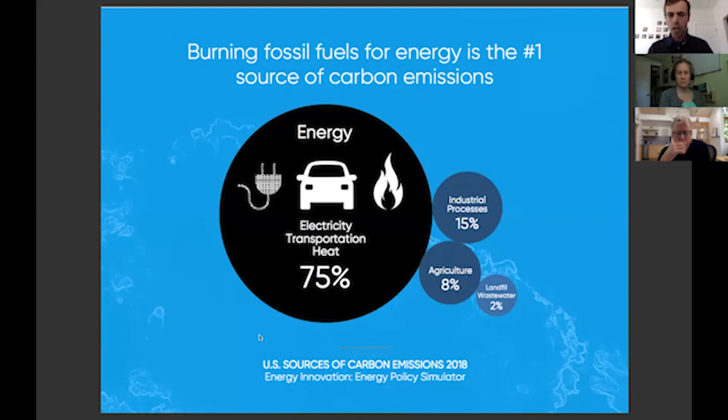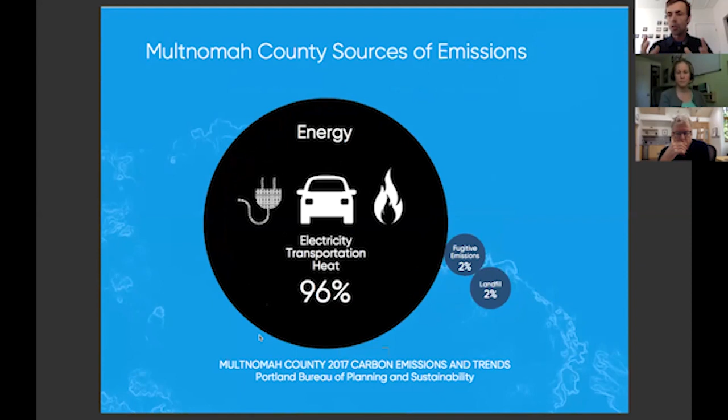For a very high top-level view on where our carbon emissions come from and why we're inspired to electrify, you can see here that burning fossil fuels is the #1 source of carbon emissions in our country, and most industrialized countries look like this. Around 3/4 of the emissions come from burning fossil fuels for electricity, transportation, and heat. In Multnomah County, it's 96%. We don't have much agriculture here. So the vast majority of our emissions come from burning fossil fuels.

And our household emissions are around 60% from burning fuels for these three uses. And rather than this being an overwhelming statistic, we feel empowered by this because we have a lot of control over how we drive our cars, the kind of fuel we use to heat our homes and heat our water, and the kind of electricity that we buy. And so we have a lot of control over that. Whereas with stuff we buy and with food that we eat, we're trying to do our best, but we're at the mercy of big systems. So that's an empowering message to us.

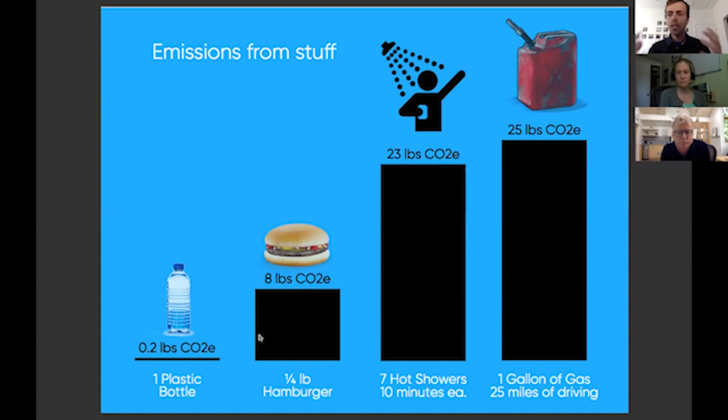One other thing we like to show for what a low-hanging fruit electrification is, there's a suite of choices we have for electrification. We've got recycling, eating less meat, getting efficient shower heads, and all these are important. But electrification is some of the lowest hanging fruit. You can see by this stat, 1 gallon of gas saves 25 pounds of CO2. So when you switch to an electric car and keep it your entire life, how many gallons of gas is that? We just want to highlight the importance of CO2 and the fact that burning fossil fuels is the primary cause of our climate crisis.

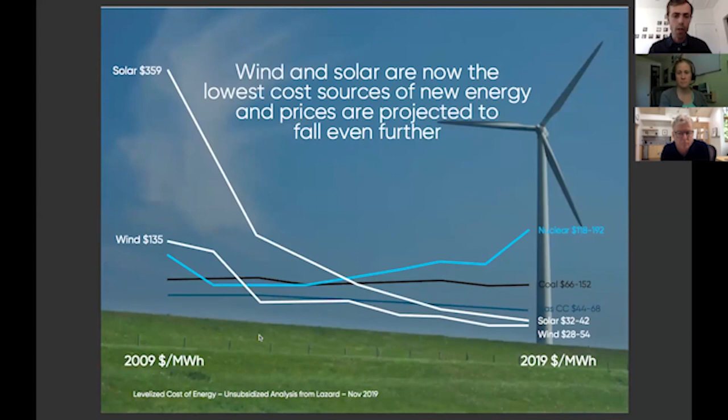The great news is we have these incredible technologies of wind and solar that are cost effective, and we can switch to them quickly. We combine that with energy efficient electrical appliances like heat pump water heaters and induction stoves, and we can run virtually all our lives on electricity. This gives you an idea of how, over the last 10 years, solar and wind have dramatically declined in cost to become the lowest cost producers of electricity.

So out of these trends, this philosophy is formed: electrify everything. We can power all of our lives on wind and sun. It can supply all of our energy needs. And that's what our panelists are going to be talking about today.

Let me introduce them. Karina Hirschberg, she's a lead engineer at PAE. Karina has over 12 years of experience in innovative electrical systems design, including research on renewable energy development, green building methods, and eco-districts. You can read about some of her projects here. Karina is going to give a high-level view of how the grid is getting cleaner, and some of the hidden emissions of natural gas.

Our next speaker will be Brian Stewart. He's the founder of Electrify Now. He has over 35 years of experience in product design and manufacturing. Before retiring from Nike, he was vice president of sustainable innovation, where he led programs to reduce waste and cut carbon emissions. He founded Electrify Now to help educate homeowners on how to dramatically reduce their carbon emissions through electrification. Brian will talk about individual use cases, how we can make these changes, what that looks like, and how it's good for individual homeowners and renters.

So with that, I will stop sharing my screen and turn it over to Karina.

All right, let me get my screen shared here. All right, look good? Yep. Looks good. All right, okay. I got myself all oriented here. All right, okay.

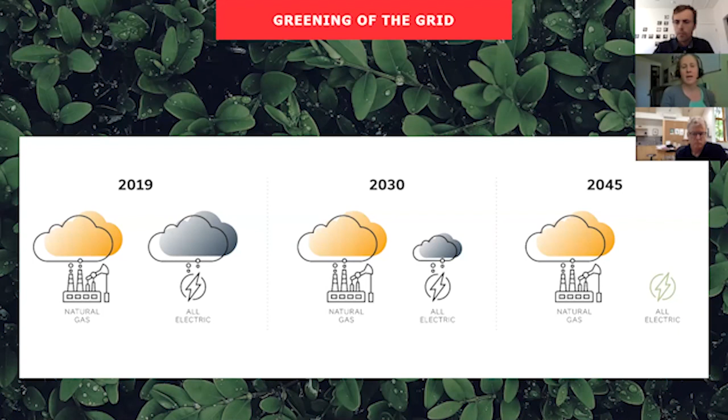And so that's a nice idea, right? But it's always good to kind of check that. It's a great theory. But what I will be diving into today is the data behind that, confirming that this is actually what's happening, and that it's not just a nice idea, but in fact an actual reality. So a bit of what I'm sharing today is my own research journey that I've done over the last couple of years, and some key questions that need to be answered.

So that we can all feel comfortable that we're doing the right thing, heading the right direction. The way I framed it for my own research was, the first one is: is there still a place for natural gas? Natural gas has been called the clean burning fuel, or the bridging fuel, the bridge between coal and renewables. So is there still a place for it? What does that transition look like for it to be achieving what we're hoping it's going to achieve?

And then, of course, are the grids getting cleaner? This whole premise that they're getting cleaner, let's confirm that that is actually happening, and understand what that looks like. And then last is, how will the new loads be supported? This is one I get asked a lot: if all the buildings and all the cars go electric, will the grids have to put on new fossil fuels to meet it? Because we don't want to move natural gas from one side of the table to the other. We really want to move it out of the system. So answering that question of how the grids meet new loads coming on is the last key one we want to touch on.

So I'm going to start first with a look at natural gas. First, the fundamentals: natural gas, that's not really what it is. It's methane, CH4 is what natural gas is. So it's methane, which is a greenhouse gas.

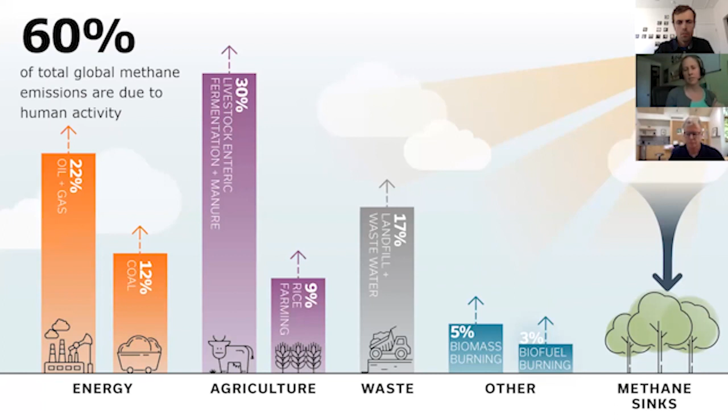So what does that all mean for the built environment? Buildings we consider as having three main sources of greenhouse gas emissions. The one we're talking about today, when we get really deep and geek out hard on building emissions, is operational emissions, which is related to the operation of the building. That's what we're dealing with today in the discussion about electricity and natural gas, trying to tackle that specific element of emissions within the built environment.

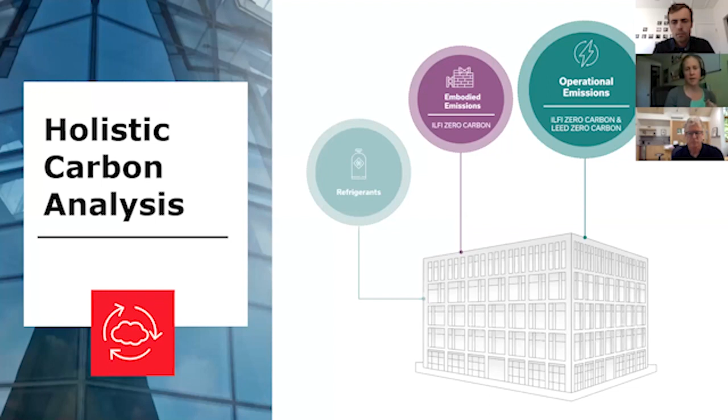The way we calculate this is we take our total units of energy and multiply them by an emissions factor, and that tells us what our total emissions are. So if you're trying to figure out the carbon footprint of your lifestyle or your home, that's essentially what some of those calculators out there are doing, and that's what you can do yourself as well: take your units of energy, multiply by the emissions factor, and then you get your total budget.

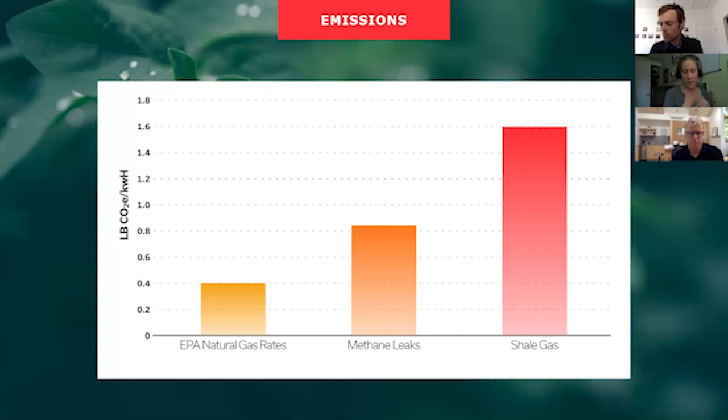The problem with natural gas is that the emissions factors that are out there and published right now are low, and there's a mounting body of evidence starting to come out as we're able to do more measurement and field analysis, showing they're extremely low. We've probably been undercounting them for quite a while, and that matters because our totals have been off, and as we do our own analysis on our own homes, our totals have probably been low.

The reason for this is that there's a leak issue within the supply chain. If we look at the natural gas supply chain, it's huge, complex, long, with lots of moving parts. And the more moving parts you have, the more likely things are going to break - that very much applies to these long supply chains. What we're starting to find is that there are more leaks happening than we're aware of, and that aren't being accounted for in these overall totals.

In fact, it's potentially what they call the super emitters - a few very large leaks that are really tipping the scales, maybe as much as 50% of total emissions coming from 5% of leaks. So if that 5% of leaks isn't being reported, those emissions are sort of phantom emissions that are part of the supply chain but aren't showing up in the emissions rates we're using.

This is an example, and if folks are interested in learning more about this, I do recommend it - there's been a couple of good pieces from the New York Times in the last couple of years. They have a very well done interactive piece that came out late last year that I recommend folks look at.

But this one was an interesting case - it was a leak that happened in Ohio, I think about two years ago. It was known to be a bad leak. They ended up having to evacuate some of the homes in the area, but it wasn't considered to be a really catastrophic leak.

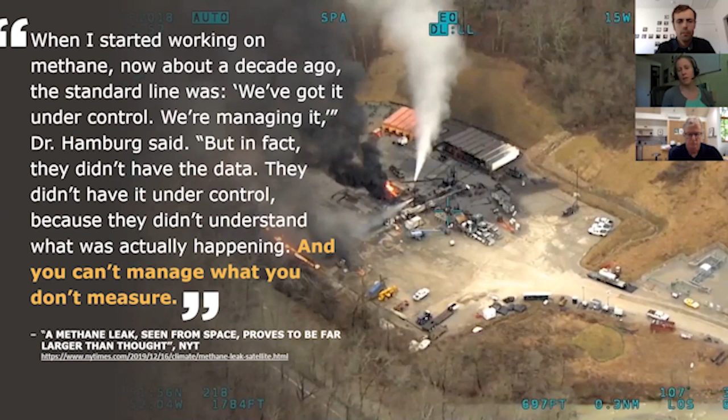And this matters, right? Because again, we think of natural gas as being the clean burning fuel, the bridge from coal to renewables. That has been changing, as we account for more of the leaks and factor in things like fracking and its impacts. The comparison of it being better than coal starts to get a little murkier.

What some of the analyses are starting to show is that at a leak rate of about 3% across the whole supply chain, we may start to cross over from natural gas being less damaging than coal to being as damaging as coal from a global warming standpoint. So the real question is, what's the real leak rate? The problem is, nobody really knows - I've seen estimates as low as 2.8%, and I've seen them go as high as 6%.

So we're either right at the cusp or we've already crossed it, but we just don't know because these aren't being measured as well as we need them to be to really answer that question.

So if we go back to our stack up of how methane stacks up against CO2, with our 20-year global warming potential adjusted for the time factor, and then try to take a guess at the leak rate—I've seen anything from the EPA's rates to 2x or 3x increases, but I took a more conservative 1.5x—if we account for leaks, we see it's really starting to stack up. So CO2 and methane are both really big deals. Maybe we should be dealing with both of them.

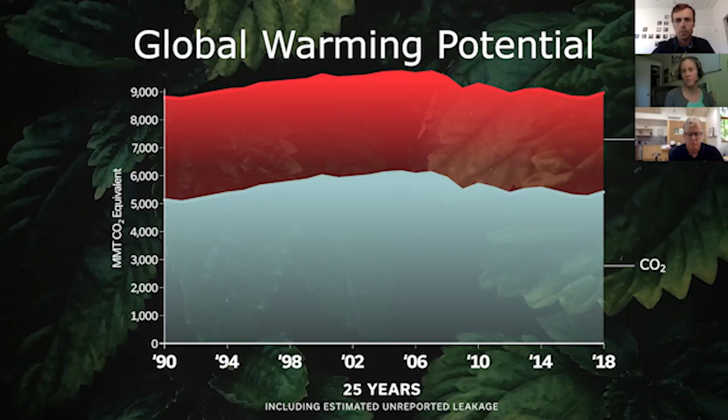This is important because as we start to tackle this stuff, understanding its contribution is important for us, so we make sure we're putting our efforts in the right place as we try to make positive progress.

And of course, the leak issue is not new information to those in the industry. It's something RMI and Environmental Defense Fund have been working on for years, trying to get policies in place, and they were quite successful for a while—there were some really good regulations put in place. Then there was an administration change, and they've pretty much all been rolled back, removed, or canceled.

There was a great article recently about one of the recent policy changes, and there was a quote in there that if you read it out of context, you'd think it came from RMI or something like that. It was actually from the president of Shell, talking about how upset they were at the policy rollbacks. You'd be surprised to hear it from Shell, but even the oil and gas majors were against a lot of these rollbacks, because it goes against their own climate commitments and undoes their PR efforts around natural gas as a clean burning fuel. So this is pretty interesting politically—both environmental groups and some oil and gas majors have been against these rollbacks.

And at the state level, we're seeing some pretty interesting activity too. The electrification movement from a policy standpoint has really taken off in California. I think there are over 30 cities and jurisdictions that now have some sort of policy around electrification, either for new construction or major renovations, trying to shift everybody to electric-only services.

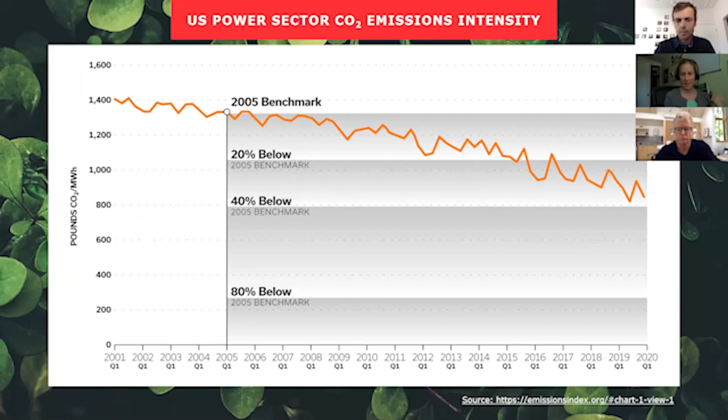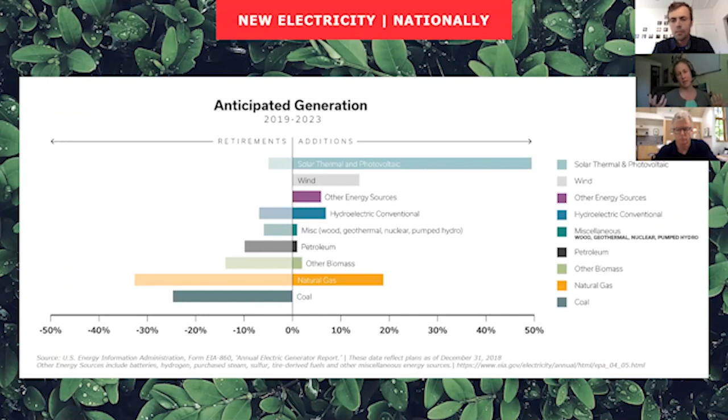So how are things going on the grids? This is the other flip of it. At the national level, we see emissions are coming down. That's good. And in terms of new installations, it's predominantly renewables at this point. They really are very cost effective. It's the right decision environmentally, and also the right decision economically for utilities. And so that's most of what we're seeing coming online.

I will mention that grid emissions and the cleanliness of grids do vary region to region, so just be aware of that. Even along the West Coast, we have quite a bit of variation. We have some very, very clean grids and some that are a little bit dirtier. So the stage they are at in the transition might change a little depending on where you're located. But generally it's coming from the state mandates. And so this is an interesting one for us to watch from a policy standpoint as citizens and as voters.

Oregon's a little bit less aggressive than Washington and California, but we're still trying to get there. So a 45% reduction by 2035, 80% by 2050. It'd be nice to see that get a little more aggressive in the future, but we'll see. So our two main utilities in Oregon, PGE and Pacific Power. How are they doing? We want to make sure that they are getting cleaner, and the good news is that they are. From an electrification standpoint, that's what we want to see. They are on track to meet the targets that are set by the state.

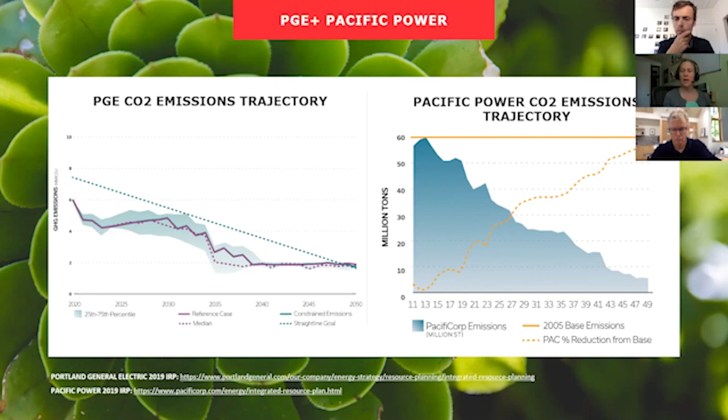PGE is going to get there a little bit faster. Actually, I think they're scheduled to hit the 80% mark by 2040. And Pacific Power is an interesting one because they're actually one of the dirtiest grids on the West Coast. They had a lot of coal, but even they're accelerating it. This is showing their plan in 2017 versus 2019, and they're actually moving faster than originally planned. So that's been really exciting to see, because again, they're one of the dirtier ones. So to see them cleaning up moves all in the right direction for the electrification movement.

One interesting little caveat in this is that when we look at the utilities and what their plans are for decarbonization, there's kind of the big ones that we all know about, right? It's wind and it's solar, and then storage is now the other one. But there's one more, and this one is called grid interactive buildings, or load flexibility, sometimes called demand response. And this is the one where us as individuals, as homeowners, can have a lot of influence.

And what this says is that it's not just where your energy is coming from in terms of whether you have solar panels on your house or whatnot, but it's when you're using energy and trying to avoid peak times, because that's actually the part that's hardest to solve in the grids, is the peak time. And that's where we're most likely to see potentially new fossil fuel resources come online, or when they get used, is during these peak times. So the really hot day, right, when everybody turns their air conditioning on.

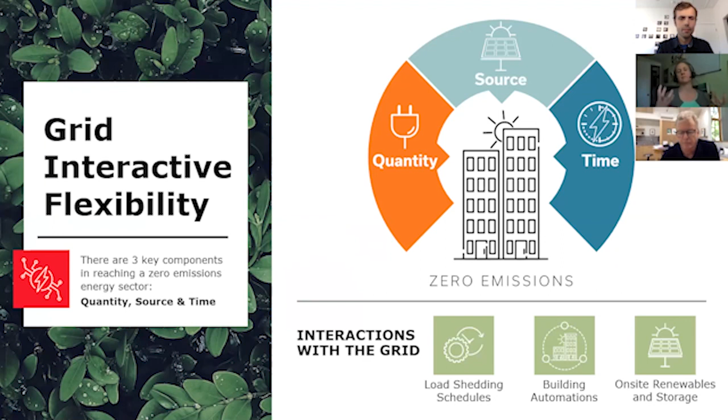That's the one that we have a really active role to play in, which is kind of interesting because it doesn't get talked about as much as some of the renewables and the storage, but it can be a really impactful one, and it's one that comes with the electrification movement. A lot of the devices that are part of it, the heat pumps and the EV chargers, actually have the software in them that allow you to do some of these adjustments to avoid these peak times and avoid those really dirty resources from coming on.

And I'll give an example here. PGE has a program that as residential customers you can participate in, and you just get a text message the day before that says, tomorrow is going to be a peak time, if you could reduce your usage between 5 and 8 p.m. And right now, it's all very low tech. You just kind of turn your lights off and eat sandwiches for dinner instead of cooking.

But the event that they had in June was one of the first ones that they had, and these really minor adjustments that everybody made that were pretty much unnoticeable, I mean, my family didn't even notice that I was doing anything, was enough to equal 11 megawatts of reduced load, which meant an equivalent of half of what they call a natural gas peaker, which is one of the dirtiest sources of electricity generation, which is amazing. It was all these little tiny incremental elements all added up to something that was actually really big. And so that's kind of an exciting one.

Again, with that electrification movement, we have this chance to participate not only in cleaning up our homes, but then also participating in the whole grid decarbonizing, right? We have a chance to play a role in that really big movement.

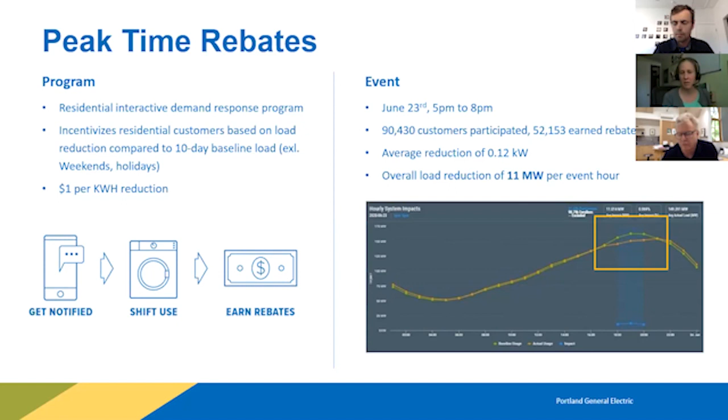And I think I'm running out of time here, but I did play around with the numbers. I couldn't help myself. I did my own home on this, and I actually do have natural gas in my house. I bought my house about 10 years ago. It was still on heating oil. We had a tank in the garage. And about 3 weeks after we moved in, there was a huge cold snap and the furnace died. And we had to make a very quick decision.

And I at the time was like, oh, natural gas is the clean burning fuel. And there was a whole bunch of incentives available. And so we installed natural gas on our house. And of course, now here I am 10 years later looking at how to exchange it all over and starting to put that plan together of how to get myself onto being all electric. And so I ran my own numbers.

And what was interesting is that today, if I were to make the switch over using the EPA's low emissions rate, I'm already lower emissions if I was all electric. If we use that adjusted rate for the 20 years, the shift changes even more. And then if we account for leaks, even more. And then if we move forward 5 years, I'm a PGE customer, and we look at PGE's plan for their own emissions decreases, the differences are even more striking.

And so the single biggest thing that my family can do is to move forward with our plans to switch out our various systems. We're probably going to do the hot water heater first, and then we're going to move on to the furnace next. And that's kind of what my family's plan is.

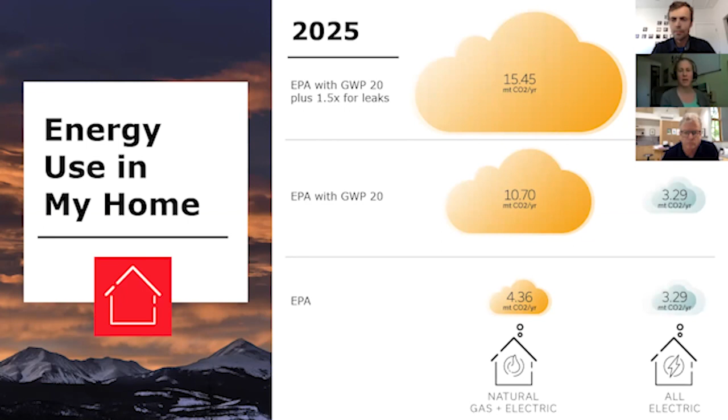There's other benefits we did not get a chance to touch on today. Resiliency is one of them. I do want to mention that because that is something that's available with electrification that is not with natural gas. And so there's kind of, again, that dual benefit of environmental benefits as well, but then we also see resiliency benefits with homes that are moving to electrification.

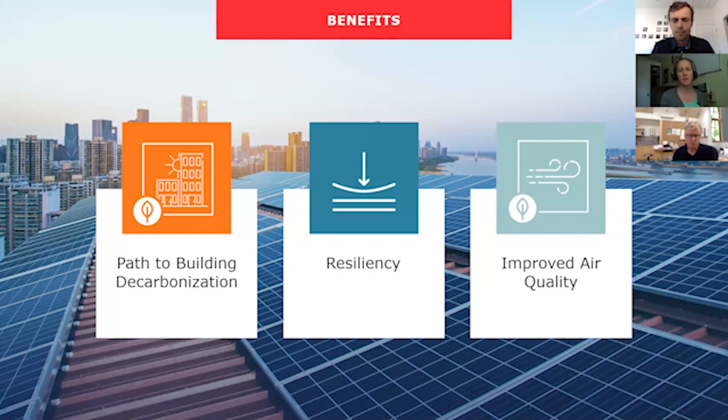So the punchline in all of this, right, is that natural gas is getting dirtier. The grids are getting cleaner. They're getting cleaner faster. We've already made that cutover where it's better to be all electric now than natural gas. That transition has already happened in our region as we compare our utilities to natural gas, and then it's just going to continue to accelerate.

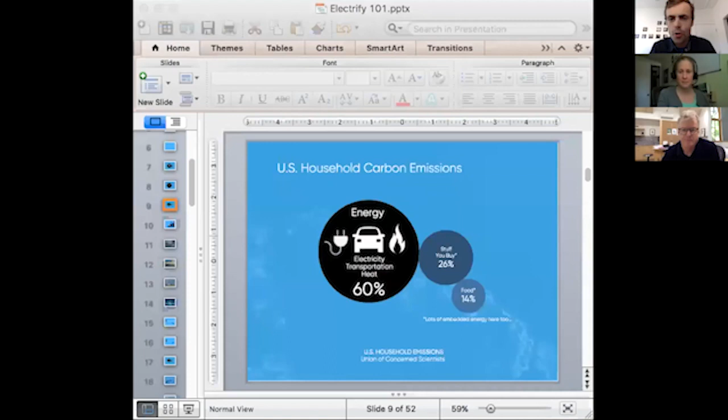Great. Are you able to see the screen there? Joe? Yes. Okay, great. Thanks. So yeah, thanks for the introduction.

And I wanted to start off by just reminding people of this slide that Joe showed earlier about 60% of our home emissions coming from burning fossil fuels for electricity, transportation, and heat. And what I'm going to be talking about today is what we can do as homeowners to be part of this transition to clean energy. Karina did a great job of showing us the grid's getting cleaner, which is awesome. We're going to be talking about ways to help accelerate the grid to get cleaner in the choices we make in our homes.

The awesome thing about this slide, like Joe mentioned earlier, why it's cause for optimism, is that black circle we have control. We can, as homeowners, make that 60% go to zero through the choices we make for the large appliances in our homes. And that's really what we're going to be talking about. Whereas these other two over here, the stuff we buy and the food we eat, yes, we can help to make these go smaller, but for the most part, these are out of our control. It relies on corporations and farms to increase their sustainable practices. So let's talk about what we can control.

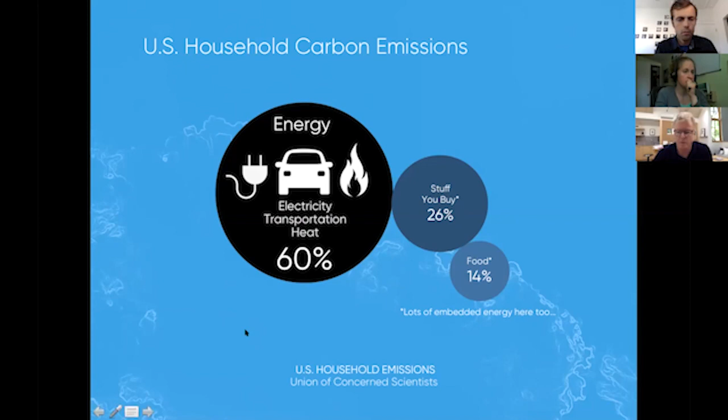And I want to start with, okay, sorry, I'm in the wrong place. I'm having to advance here quickly, sorry.

Okay, let's start with just thinking about what you have in your own home. I did this in my house, and it occurred to me one day I've got all these devices in my home that burn fossil fuels. Everything from the stove that we cook on, the furnace, the water heater. We have 2 cars, we're a typical American family. Our lawnmower, barbecue, all these things burn fossil fuels. And when you add up the cumulative emissions from these things, it's over 20 tons a year for a typical American household. And I've done the numbers for Oregon and for America. They're not vastly different. It's a little bit better here actually than many places because our electricity is a little cleaner, but over 20 tons per year for a typical home.

And when you think about how much we spend on that, this is another number that's kind of invisible to most of us because we get monthly bills, we get occasional bills with going to the gas station, but when you add it all up, we typically spend about $4,000 per year per household on our energy bills, and really all that money for the most part is going to fossil fuels. So $4,000 per year per household.

You multiply that by 126 million households in the United States, that's $500 billion that people like us spend on energy every year. And this is not corporations and businesses, this is just homeowners, apartment dwellers, renters, people like us. As a reference number, there was $55 billion last year spent on clean energy investment.

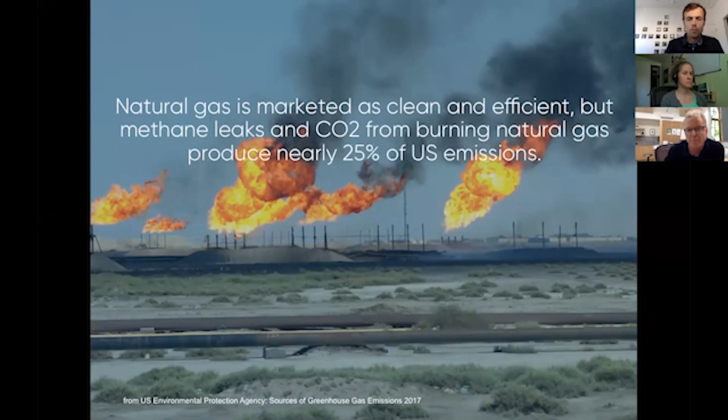But if you're a homeowner, what that translates to, because most of us here in Oregon use natural gas for heating, that differs in different parts of the country. In fact, we had a question from a friend of ours in Nevada who's on propane. Propane is actually a little bit worse, I'm sorry to say, than natural gas. But regardless, electricity everywhere is better than natural gas.

And if you look at your furnace, it's going to be about 3 tons that a typical furnace here in Oregon produces in terms of emissions every year. And a water heater, surprisingly, is almost as bad, at 2 tons. So those are the 2 big ones in your life. There's other things like your stove and fireplace insert, yes, but these 2 are the real biggies we're going to focus on.

And the exciting thing, I have to say, one of the reasons I'm so obsessed about this now is because a year and a half ago, when I was doing the research on this stuff, I didn't even know what a heat pump was. The truth is, these things have been around for decades and they're insanely efficient. They'll save you money. They'll give you all sorts of other benefits. They're way, way, way more efficient than natural gas.

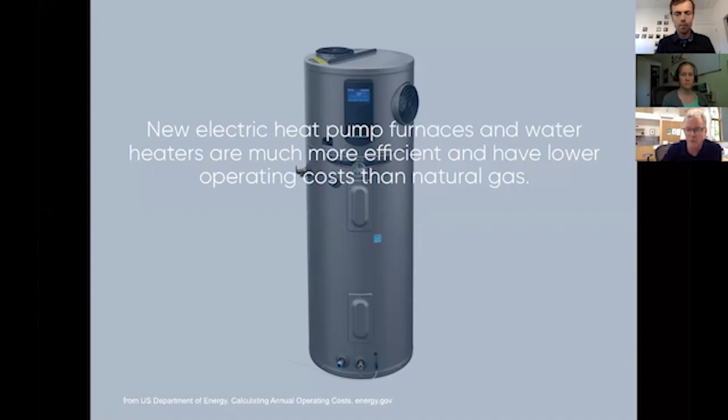And you can use the same technology, heat pumps, for furnaces, air conditioning, and for heating your water. It sounds like a space age thing, but the truth is they've been in our lives forever. Anyone who has a refrigerator has a heat pump in their home right now. Basically what this technology does is move energy from one place to another.

So your refrigerator, if you put your hand behind the back, you'll feel how it's warm back there. That's because it's moving heat from inside your refrigerator to your kitchen. Your kitchen gets slightly warmer, and inside the refrigerator, it gets cooler. So it's not making heat or making cool, which currently isn't possible, but it moves heat from one place to another, and that's why they're so efficient.

A great way of demonstrating this efficiency is to compare water heaters. Here in Oregon, if you spend $10 on natural gas, you're going to get about 5 hot showers for that. Maybe 7 if you have the most expensive, up-to-date gas water heater, which most people don't have because they cost like $3,000. But typically 5. For a good heat pump water heater, not even the very best, you're going to get 10 for $10 worth of electricity.

So twice the amount of benefit basically for the same money, which is why this technology is going to be the future. I think if we flash forward 20 years, the only kind of water heaters that are going to exist are heat pump water heaters. But the urgency to make this transition now is why you as a homeowner can make a big difference in terms of avoiding the worst effects of climate change. And it's going to save you money. This is why that's a fact.

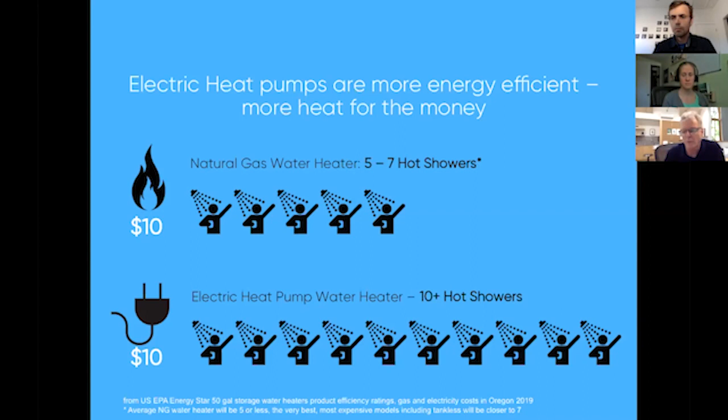Now, it's important to note that they can be more expensive upfront to install. We're going to go into all this when we dive into water heaters later, but you will more than make up for the money in the long term through the operating cost savings.

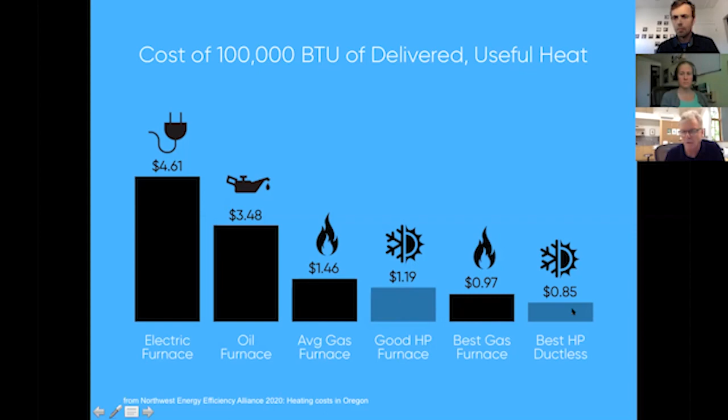The same is true with furnaces. It's not quite as dramatic, but for most people the relevant comparison is this: if you've got a furnace that's more than about 5 years old, it's typically in this rate, or it might be even more because efficiency degrades over time. If you've got an electric or oil furnace, a heat pump's going to blow those away in terms of cost per BTU. The very best modern gas furnaces are quite good in terms of their cost, but the big takeaway is that from a cost standpoint, heat pumps are at least neutral, if not better. And the best ductless heat pumps are absolutely the cheapest way to get heat in your home. We'll talk about all this in more detail when we get into the details on furnaces.

But the other advantage heat pumps have is they can work both directions, so they give you air conditioning as well. That's becoming more and more of an issue, even here in the cool Northwest, where summers are getting hotter and forest fires don't make you want to open your windows at night. Having air conditioning essentially for free when you buy a heat pump furnace is pretty attractive. They're also more comfortable because they're moving air more constantly, so the temperature in your home stays the same instead of spiking when the furnace turns on and off. And because of that continuous air movement, you get cleaner air, which is actually noticeable. People are quite happy with the way these heat pumps perform.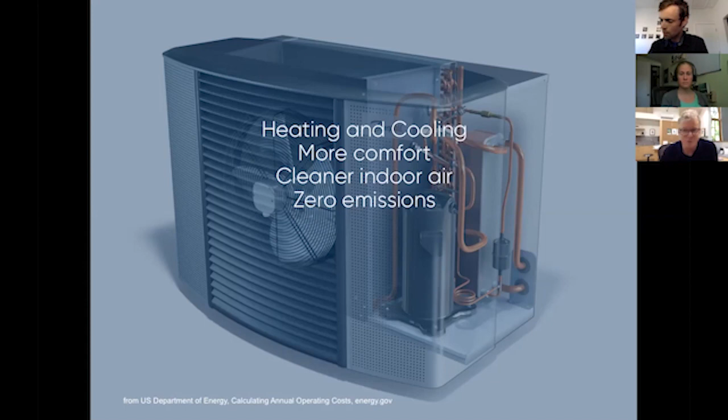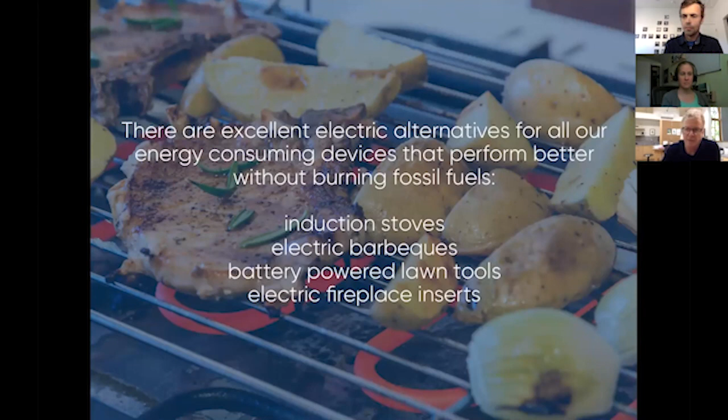And because you signed up for clean energy, it's creating zero emissions, which is fantastic. There are tons of other devices in our homes that burn fossil fuels, and there's an electric equivalent for every one of them. Believe me, I've done this myself, I can vouch for it, they're better. Induction stoves versus gas stoves, even electric barbecue versus gas barbecue — I'll talk to you about that, we're going to do a session on that later. But just know that any device you have right now that burns natural gas, gasoline, or propane, you can replace with an electric option, and you'll be happy you did.

Transportation — I think a lot of us know that transportation is a problem, and that cars create emissions. There's a lot of discussion too about airfare and air traffic, and a lot of shaming about air travel, and I get it. We should all be thinking about reducing air travel. I think the pandemic showed us we don't have to fly around as much as we thought. But the truth is, if you want to get from here to New York City or to Tokyo, there's no better way, no alternative other than to fly. So if you have to fly, I don't want to talk you out of it if you need to visit your grandmother or something. But the truth is airfare is a relatively small part of our transportation emissions.

The big one is the car in your driveway, by far the biggest one — 60% comes from cars we drive, another 23% comes from trucks on the road. The good news and bad news is we don't really have good solutions for those yet. It's being worked on — hydrogen's appealing and might come online, and there are some electrification options there, but this is going to be tough. There is good technology today to solve these two problems, and you're going to be seeing trucks on the road in the next year.

That's going to happen fast. And for the reasons we'll describe later, it's not because the truckers are really trying to save the planet. It's because it's cheaper. And the same is true for automobiles.

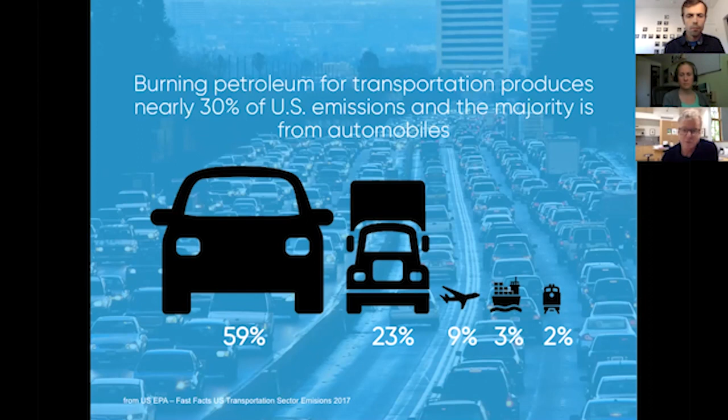The reason why these gas cars are so bad is because 1 year of driving around creates almost 6 tons of carbon emissions, which is about the same amount it took to make the thing. And then it's going to be on the road for 12 or 15 years. So that's 75 tons over the lifespan of it, which is 10x what the emissions were to make the thing in the first place.

That's a reason why you shouldn't worry about squeezing every last ounce out of any of these things you have, because that calculation is true for pretty much everything that burns fossil fuels. Don't worry about squeezing every last minute of life out of your fossil fuel things. Get rid of them as soon as you can, because using them is way worse than making them. So retire them. But 5.8 tons a year.

If you have an electric car, you charge it at home, which is what people do. 95% of the charging happens in your garage, plugged into your electric supply. And because you've done step number one, all your mileage is zero emissions, which is pretty amazing.

The great news is that battery prices are getting lower. It's on the same curve that we saw with solar, a tenth of what it was 10 years ago, and it's projected to get under $100 per kilowatt hour for batteries in the next year or so. So that means the cars are getting cheaper, and they're going to continue to get cheaper as they scale up.

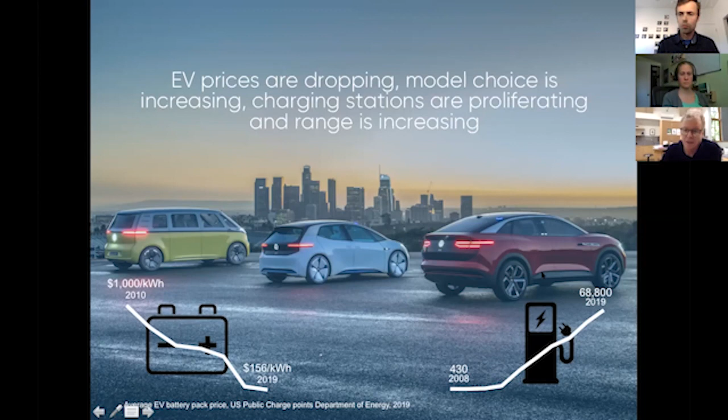And the prices are surprisingly affordable today. There's this perception that EVs are more expensive, and yes, there's some truth to that. But if you really dive into the numbers, you'll see that it's not true. They're actually cheaper, even today.

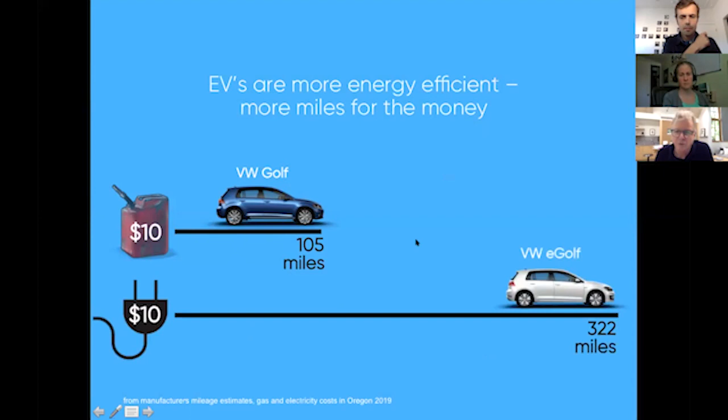The reason that the trucking companies are so excited about this is this comparison here. Another model where there's 2 versions is the Volkswagen Golf. The gas Golf gets pretty good mileage—for $10 of gas, you're going to get 100 miles of travel. The electric version, for $10 of electricity, you're going to get 300 miles of transportation. So this is why the trucking industry is so interested in this, and why it's going to happen fast in that sector, because fuel is the most expensive part of their operational cost by far.

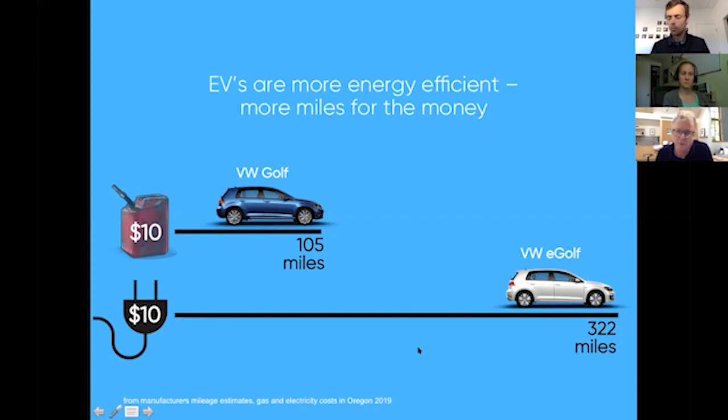And then the other thing, the qualitative things—talk to anybody who owns an EV, they'll tell you they're never going to go back to a gas car. They're way more fun to drive, faster acceleration, all that stuff. Even my wife, who isn't a big car enthusiast, is crazy about how fast our cars accelerate and how fun they are to drive. And yeah, who wants to go to a gas station? Raise your hand if you love gas stations.

I don't think many people out there are raising their hands. You can just eliminate that from your life. So there are a lot of other good reasons to do this.

I've thrown a lot of information at you and we're running short of time, but if you take nothing else away from this, remember these 4 largest sources of emissions in your life. Yes, it's important to think about the choices we make for the products we buy, the food we eat, how much we travel, and energy efficiency is super important. But these 4 decisions you make — the electricity you purchase, the car you drive, the furnace, and the source of energy for your furnace and water heater — those blow any other decision about carbon emissions away by factors of 10.

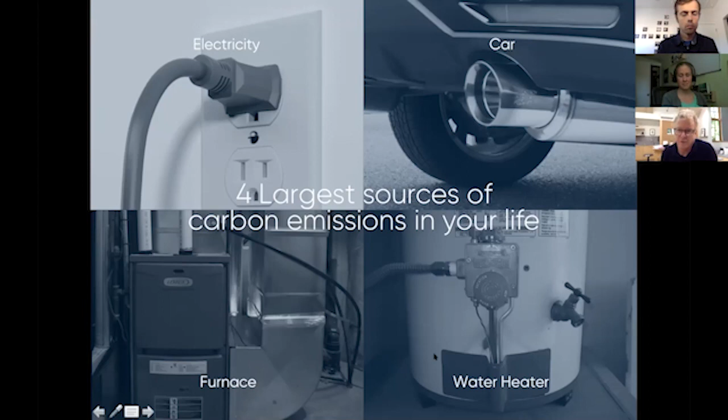These big ones aren't fun to do. Nobody wants to buy a new water heater. But when it's time to do that, make sure you're thinking about heat pumps, same with furnaces, and do it sooner than you might otherwise want to if you're able to, because that's how you're going to avoid a lot of carbon.

So, summary: these are the 3 steps. Clean up your electric supply — I'd ask you to go check where you are on your electric plan as soon as you hang up here. Electrify your home, electrify your ride. You're going to be avoiding tons of carbon emissions.

You're going to enjoy a more comfortable life and a lot of performance benefits. You will save money on operating costs, absolutely. And importantly — this is a really big one — what you're doing is helping accelerate the transition to these clean energy solutions, which are essential. Otherwise it's really bleak for our offspring in terms of what the world's going to look like to live in. So the faster we do these things, the better.

If you want to hear about what this can look like on a more national scale, I love this book from my friend Saul Griffith. He just launched this a few days ago. It's kind of a handbook for how to do this on a large scale — kind of equivalent to thinking about the way we mobilized for World War II. It's that kind of thinking. It's a really good read if you'd like to see what that looks like on a national scale. And again, if you have any questions about this, we have tons of information on our website, electrifynow.net.

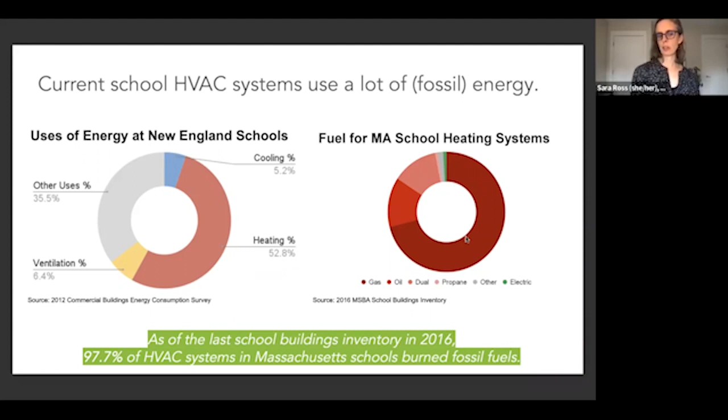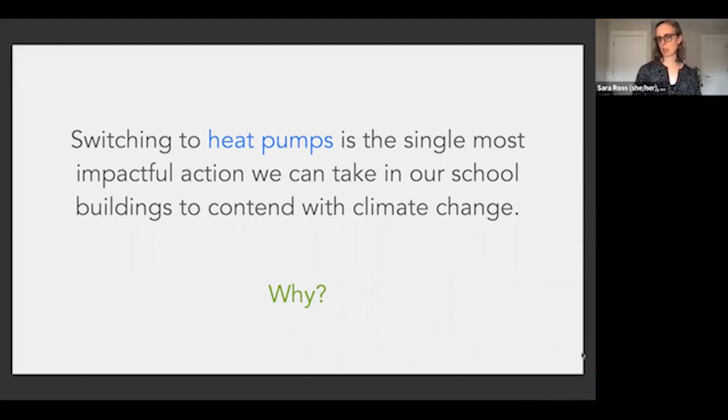You can go to the next slide. Next, I'm going to make the contention that switching to heat pumps is the single most impactful action we can take in our school buildings to contend with climate change. Why is that the case? Let's step back and make sure everyone knows what a heat pump is. Heat pumps are a magical piece of mechanical systems that do a smart thing and move heat rather than burning fossil fuels to make heat.

This eliminates all the on-site combustion that would normally be associated with an HVAC system. This improves indoor and outdoor air quality. Heat pumps are also highly efficient, whereas a brand new top-of-the-line gas boiler is only going to get to 98% efficient. Heat pumps, particularly ground source heat pumps, can get to 300 to 600% efficient. That means for every 1 unit of energy we put in to run this piece of mechanical systems, we get 3 to 6 units of heat out. And again, that magic happens because we're moving heat rather than burning things to make heat.

The last thing to know about heat pumps is that they offer both heating and cooling. This is really important for our school buildings. Can move on to the next slide.

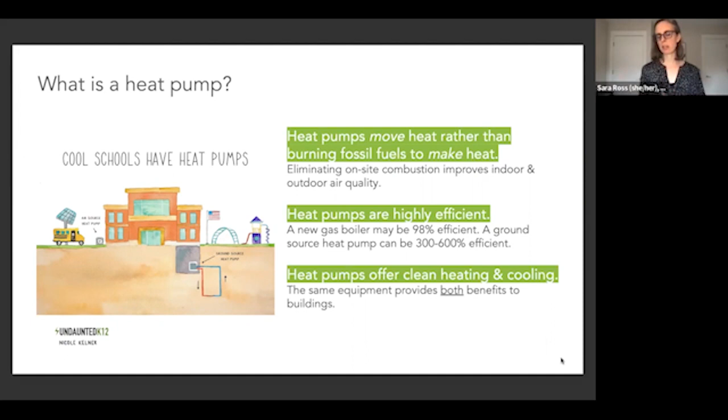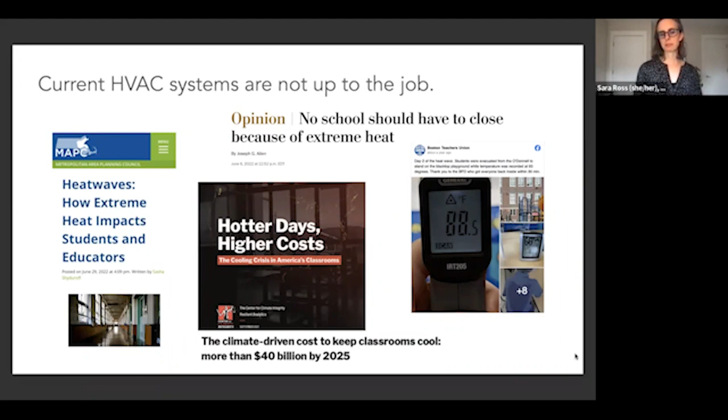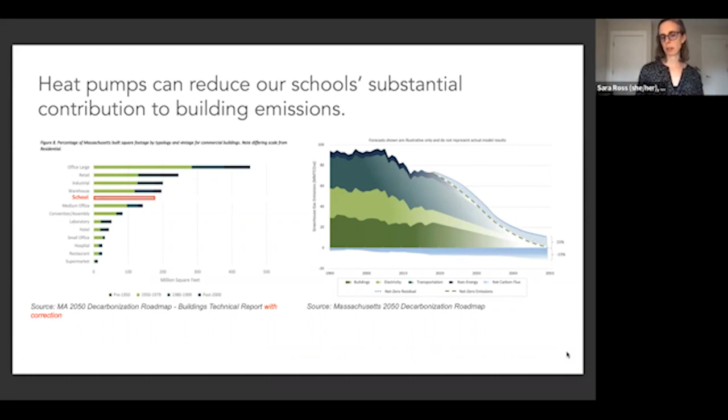Next slide. So now is really the moment to take action. Why is that? You've already gotten kind of the spoiler alert there, right? These new federal funds that are now available for schools.

It's non-competitive. There's no application in the sense that you need to kind of justify your expense. This is about documenting the work that you've done. And it's paid for the first time as a cash payment to non-taxable entities like schools. There is no funding cap on this opportunity, so they're not going to kind of run out of money. The typical value for this incentive will be somewhere between $2 to $6 million, just to give you some sense of how much this is really going to be worth to schools as they seek to move in this direction.

Now, schools in Massachusetts can pair that with a newly enriched, really valuable incentive from Mass Save. They now are offering $4,500 per ton. This is based on the size, basically, of the HVAC system for schools, both in new construction and, importantly, in retrofits. Similarly, this is non-competitive. So the typical value of this incentive will be between $500K and $2 million for a school. Next slide.

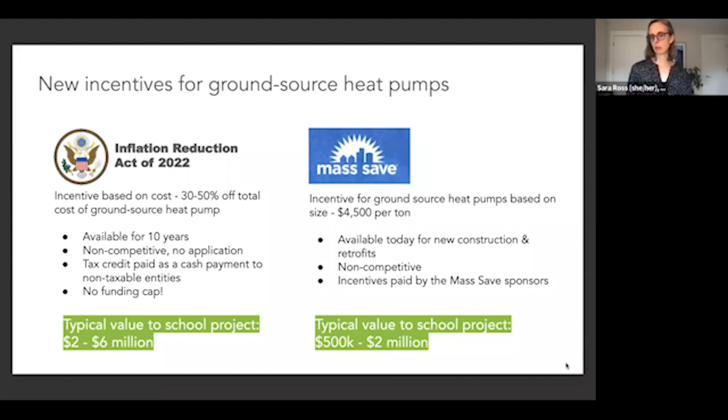So to wrap this all together in a project that I know well, that's going on here in Massachusetts right now, we have some price points for a new school where we're hoping to combine a ground source heat pump and a solar array that'll provide the clean energy for this heat pump. And right now, the price points for those two really important, really valuable pieces of technology is $13.7 million. Just to give you a sense of how these incentives will reduce that upfront cost, that Mass Save incentive is going to take $1.6 million off the sticker price.

The Inflation Reduction Act is going to take somewhere between 30 and 50% off the sticker price, turning the new cost upfront to this district to somewhere between 5.2 million and 8 million. That is just a whirlwind change from where things were before the Inflation Reduction Act was passed, before Mass Save made these incentives even more valuable.

So in talking with engineers across the country, post-Inflation Reduction Act, what I'm hearing is that as they are bidding out new work, they're finding that ground source heat pumps, the thing that used to be the most expensive, is now coming in as the least cost option for many of their clients. So this is just a huge change, and something that Massachusetts schools can all organize to take advantage of in the coming years. Next slide.

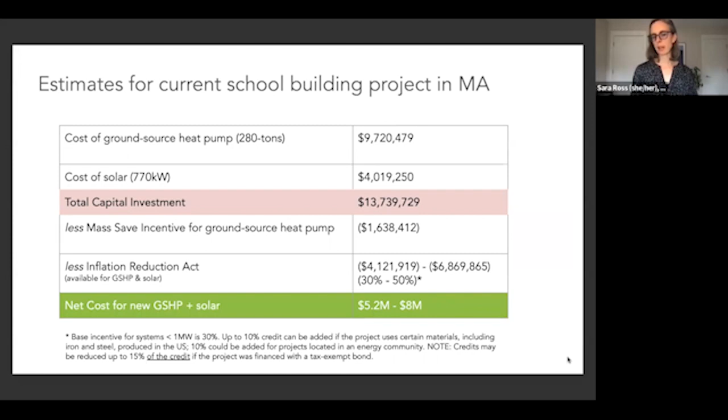Really, just to highlight, there are 6 benefits, and we've touched on some of them, of why this is so valuable, moving from a pre-IRA world where the vast majority of our schools are dependent on gas and oil: adapting to these new cooling needs, enhancing efficiency, improving air quality. There's also health and safety concerns in getting this combustible fuel out of our schools.

When paired with solar and energy storage, as they're going to do in Acton Boxborough, we can build the resilience of our school buildings. And of course, by removing the combustion of these fossil fuels, we are helping schools participate and be part of mitigating impacts on climate change and achieving our Massachusetts goals of achieving net zero.

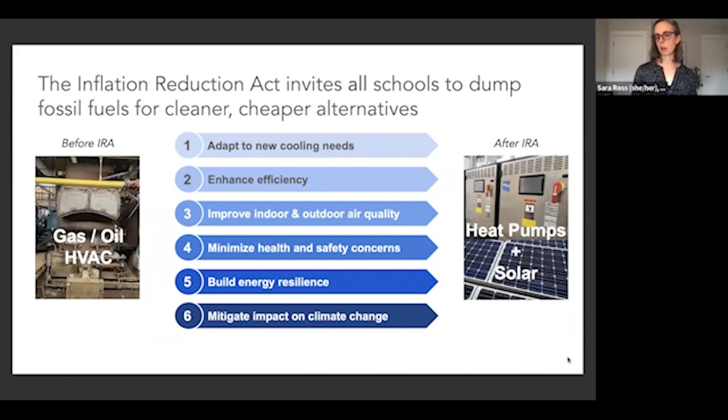Thank you. Oh, sorry. Are you introducing me or? Yes, I'm trying to get the tech. All right. We can all see each other again.

Sara, thank you so much for your presentation, for sharing these game-changing new incentives, particularly, and for setting the stage for us. So next, we will hear from Pip Lewis with a Boston school case study. Pip is a principal at HMFH Architects and AIA and LEED AP certified. HMFH Architects is a Cambridge-based woman-owned architecture firm specializing in the design of innovative, sustainable learning environments. Pip has over 40 years of experience in the architecture, engineering, and construction industry, and has led the design of numerous successful school projects across Massachusetts.

Most recently, he has been the project director for the new all-electric, carbon-neutral Josiah Quincy Upper School in Boston's Chinatown neighborhood. Pip, thank you so much for being here. I will let you take it from here and tell us all about the Quincy Upper School. Okay, thank you.

Next slide. And you can go on to the next slide.

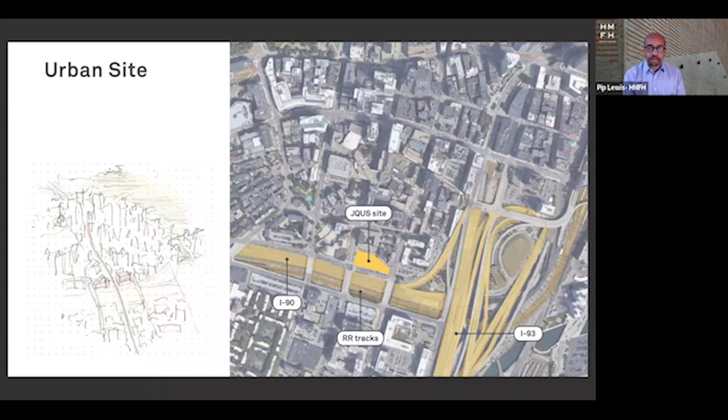A Tufts University study recently found that the area that's being built in has the most polluted air in Massachusetts due to being located directly adjacent to the Mass Pike and so close to the massive I-93 interchange and also railroad tracks. Next.

It also was being designed when the then Mayor Walsh issued a zero carbon executive order asking that new municipal buildings be built to be electrically heated and cooled. So that became our goal for the project.

And as you see here, we also created a very large outdoor educational space on the roof area of the Quincy Upper School, where students will find activities such as outdoor classrooms, student gardens, gathering spaces, giving students an opportunity to get some fresh air way up high, where the Tufts study says the air will actually be cleaner than it is at grade. Next.

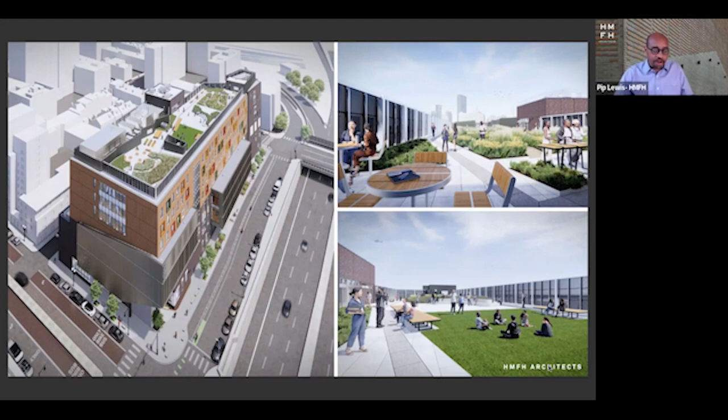The study also recommended that buildings might mitigate poor air quality by following a few steps, and we have incorporated them into the design of the building. First of all, the school's fresh air is drawn from as high as possible and facing away from the pollutant source, which in this case is the turnpike. The classroom air, for instance, will come from rooftop units located 130 feet above the street.

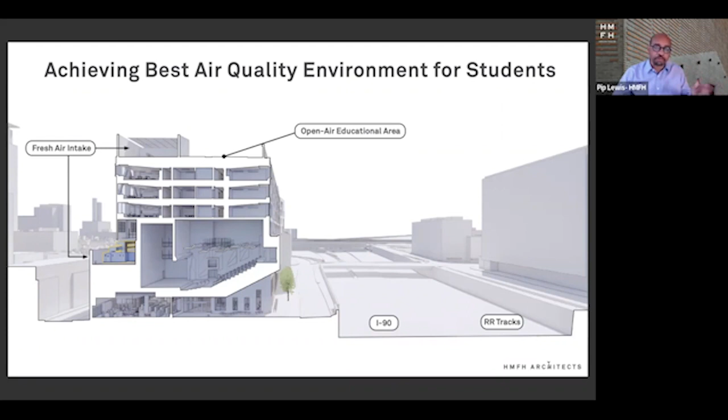We also upgraded the MERV 13 filters to MERV 14 filters in order to decrease the amount of particulates that's in the air that people will breathe inside the school. And then one final step that we took was to use the displacement ventilation system within the rooms of the school, but I'll get to explaining that in a moment. You can go to the next slide.

First, I wanted to look at some of the process of choosing the system using a life cycle cost analysis and other methods. And this was actually a complex process, which is full of choices, and we found also full of some compromises, which you'll hear about. The first cluster of information there goes to predicting the energy that a building will consume, resulting in a simulation for that building, or an energy model.

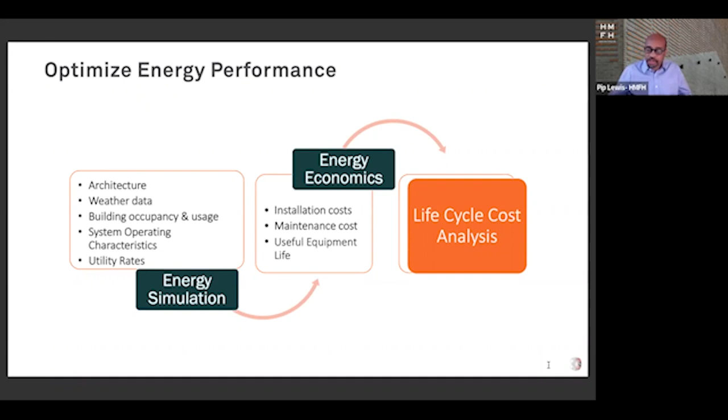The second cluster is establishing what the costs of that system will be, including first the construction costs, maintenance costs over time, and the useful equipment life replacement costs, all resulting in a life cycle cost analysis. Go to the next slide.

Yeah. And we looked at several options that all really focus on all electric choices. And the life cycle cost analysis really led us to looking at the top two options there, 1 and 1A, which are actually both very similar displacement ventilation options, and are kind of illustrated, if you can see, in that little model of a room there on the upper portion of the slide.

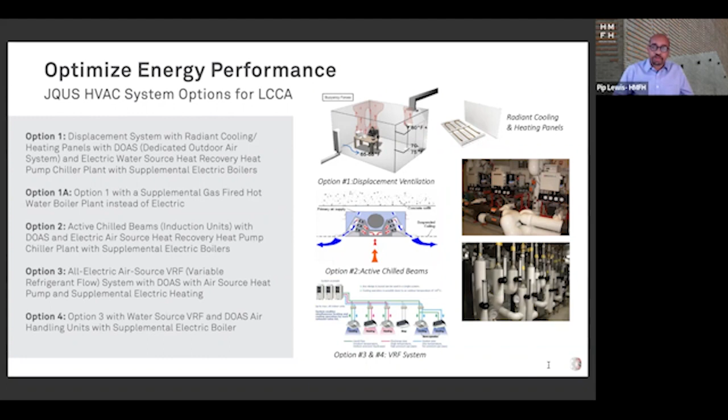The only difference between the two systems, I'll get to later on, involves boilers. But they both use water source heat pumps located on the roof to condition the air very effectively, and radiant panels within the rooms to temper the spaces. You can go to the next slide.

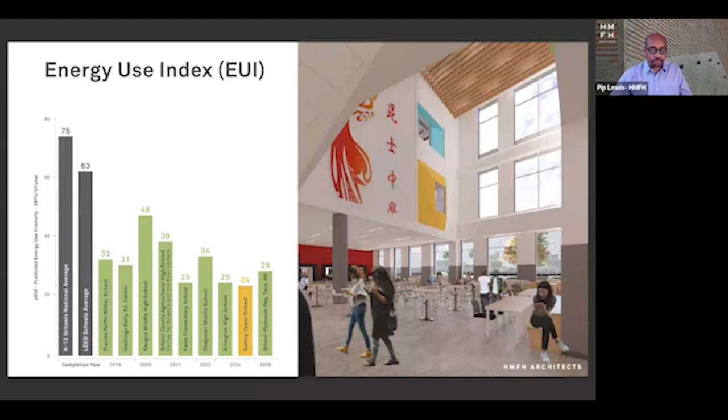And it's interesting to see that the national average for K-12 schools is 75, which is 3 times as much energy being expended per square foot than we're expecting the new Quincy Upper School to use.

Next. And now to sort of explain displacement ventilation and contrast it with the traditional mixed air method that we're all used to seeing. In mixed air systems, warm or chilled air, depending on the season, is projected into the room at a relatively high speed to mix with other air to reach the desired temperature. In displacement, however, large quantities of air are allowed to flow out low across the room at a slow speed, displacing the existing warm air there.

The occupants themselves in the room heat the air slowly, and it will rise vertically to the ceiling where it's exhausted. This vertical motion limits the spread of dust and allergens around the room, in addition to providing a very good and very quiet indoor air quality environment.

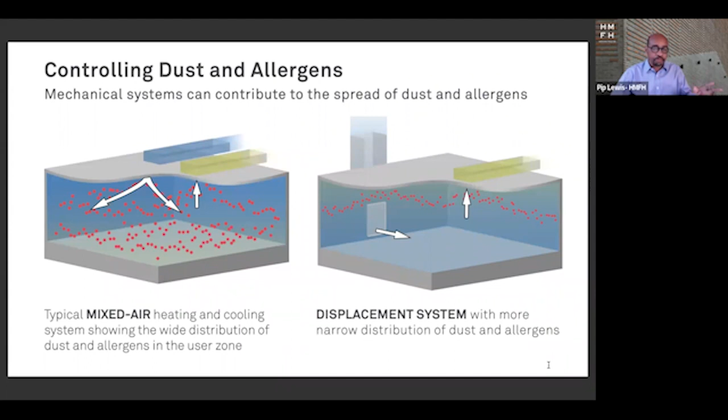But next slide. We did run into a stumbling block. The water source heat pumps that we were trying to use could not extract enough heat on the coldest winter days to sufficiently heat the school. And so we needed to supplement with supplemental boilers, which are located on the top of the building, that long gray box on the right-hand side. And these either needed to be powered by electricity or gas-fired.

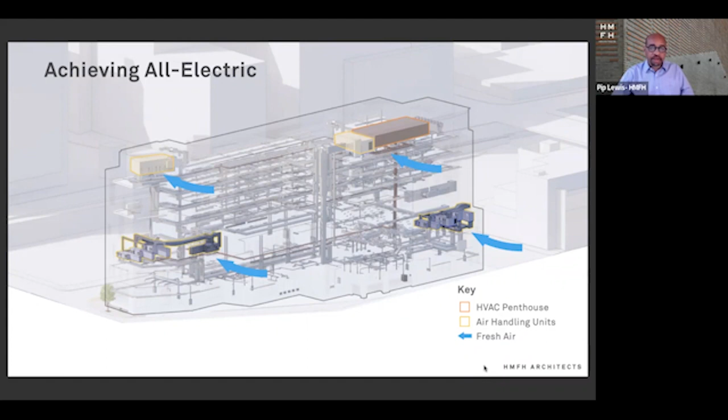But go to the next slide, please. Thank you. There are ways of mitigating this cost difference. We at Quincy Upper plan to use a photovoltaic array to offset the costs of the electricity. We ran into some hurdles there, but we'll talk about it in just a bit. But one might also use air source heat pumps on the roof that would eliminate, we understand entirely, the need for the supplemental boilers. However, these are very large and would take up more space than we wanted to use, which we wanted to prioritize for that rooftop educational space that you saw.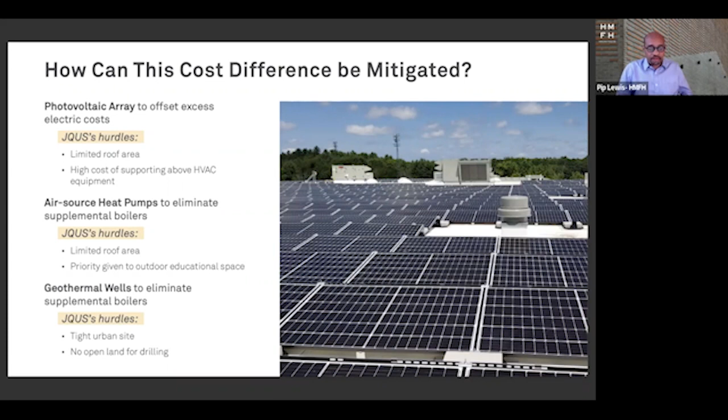You could also use a geothermal system or ground source heat pump system that Sarah talked about. And that would also eliminate the need for these supplemental boilers. But in Quincy Upper's case, we had such a tight urban site that we really didn't have any open land to use for the drilling of the well fields.

Next. And as I said, our intention at Quincy Upper was to use a photovoltaic system. But even this system needed to be very small because our rooftop is very small. And it had to stay off of the area that was going to be occupied by students. And so it had to be built on structure over the mechanical units that are on the roof. So it was also expensive to provide that structure.

And as we did an analysis of the energy that the system would generate versus the cost of the system over time, we were finding a savings, but the savings wasn't enough to completely mitigate the high cost of electrical for the boilers. And so eventually, as we wrestled with the budget, we had to value engineer out that system.

Now, I really don't think that most school projects will have the same problems finding the perfect system as the Quincy Upper School did, because you'll have plenty of rooftop area, plenty of site area, and you'll find one or more practical and very economical ways of providing an all electric facility. Happily, Quincy Upper chose to adhere to the city's commitment to a zero carbon all electric facility and stayed with the electric boilers despite our electric utility costs.

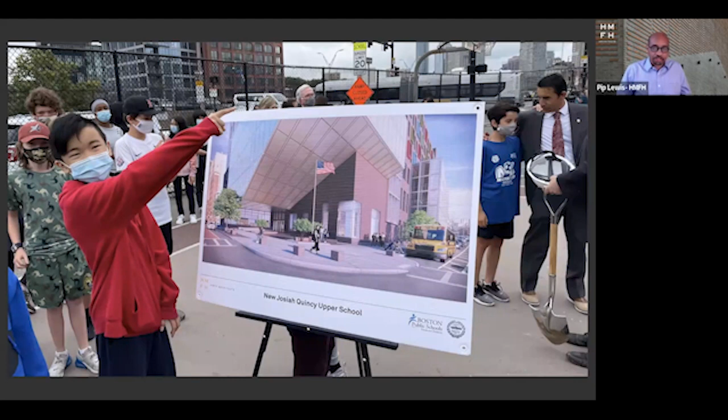Pip, thank you for sharing that gorgeous school with us. Next, we're going to hear from Talia Fox on Arlington's Air Quality and Electrification Master Plan. Talia is the Sustainability Manager for the town of Arlington.

In this role, she is leading implementation of the town's Net Zero Action Plan, Green Communities Program, Arlington Community Electricity Program, and the Electrify Arlington campaign, among other projects targeting greenhouse gas reduction. Talia has expertise in community-driven sustainability and resilience planning, facilitation, and equitable community engagement, and has led several climate action planning processes in the greater Boston region.

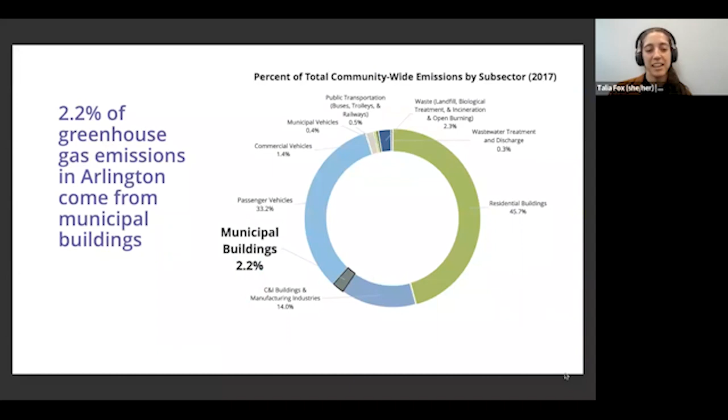So like other municipalities, municipal buildings are not a huge portion of our total community-wide emissions. Nevertheless, it is important that as a municipality, we're focusing on reducing greenhouse gas emissions from our buildings because we have a degree of control over those buildings, unlike other buildings in town. It's important to be leading by example in this space right now.

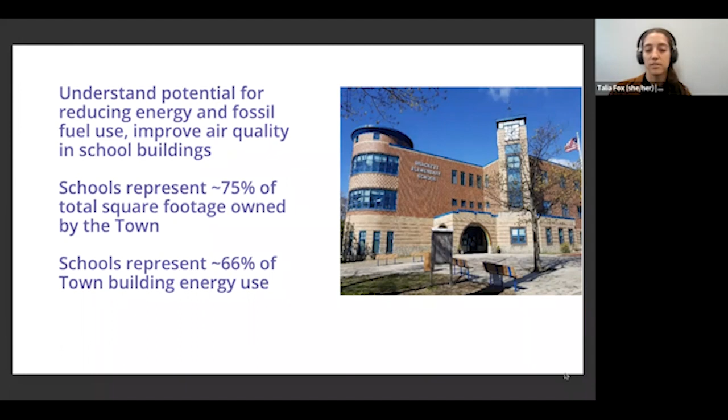So the goal of our master planning effort here was to understand the potential to reduce energy use and fossil fuel use in existing buildings. We're looking here, in sort of an innovative way I think, at retrofits versus new construction. And we wanted to improve air quality, specifically in our schools. We focused on schools because they represent about 3/4 of the total square footage that the town owns, and 66%, nearly 2/3 of our building energy use in town, of the municipal building energy use.

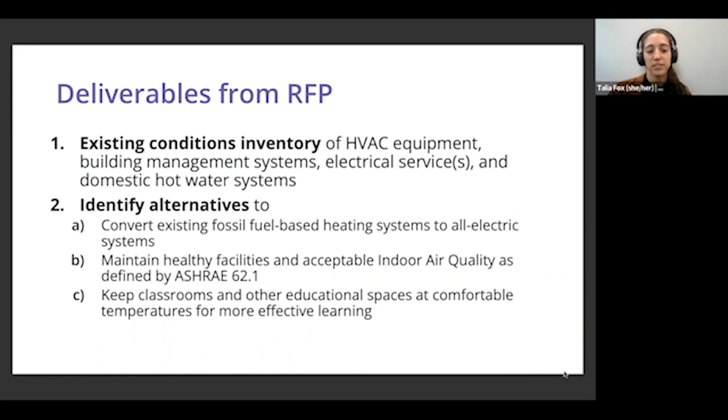We had some high-level goals for this study. Here are some of the deliverables listed in our RFP, which we'll be sharing after this event. First, we wanted to understand what our baseline was: what existing HVAC equipment and systems did we have in place, electrical service to the building, domestic hot water, and the like. We wanted to identify alternatives: how could we convert our fossil fuel-based heating systems to all electric? We wanted to make sure we could maintain healthy facilities and acceptable, if not superior, indoor air quality, and make sure our classrooms and educational spaces were comfortable for learning and teaching.

Other deliverables for our RFP included understanding what solar capacity might be needed to offset energy use on site. So our consultant is looking at rooftop solar photovoltaics and solar hot water, as well as feasibility of battery storage. And finally, it's important for us to understand the timeline for these projects, for these 6 schools and their renovations, and what they're going to cost. That's a big part of this report.

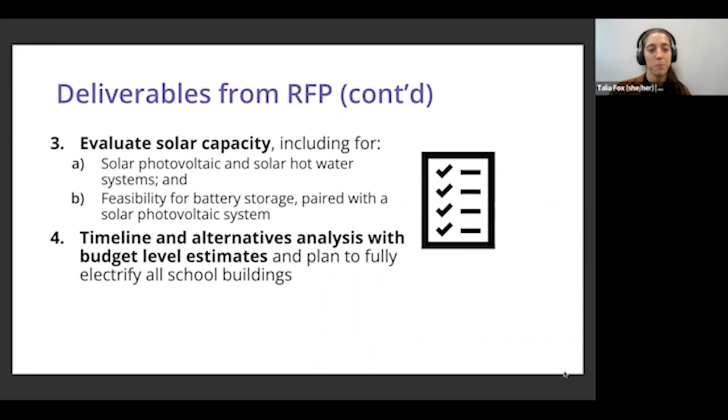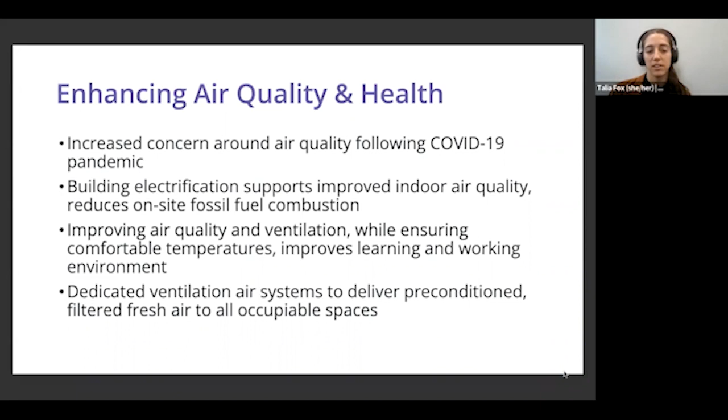A big focus, as I mentioned, was air quality. It's in the title of the master plan. Like in many places, there is increased concern around air quality following the pandemic. Arlington invested in a lot of filtration equipment for our schools. Electrification supports indoor air quality; we want to be reducing on-site combustion and improving ventilation to support that comfort and better learning and working environment. The 2 viable electrification options that we looked at, which I'll talk about later, have dedicated ventilation air systems to deliver filtered fresh air to all spaces.

And we are in phase 3 right now, so I will not be able to share specifics from our budget, but that is underway. So our consultants looked at 4 alternatives for our HVAC systems in the 6 schools.

I'll say 2 of these are largely for reference. The first is an in-kind replacement, where we're basically assuming we'll replace all existing equipment with new equipment when it breaks. So that's keeping natural gas in a lot of cases, and also in other cases not even including AC.

The second option is, I'd say, a standard but inefficient electrification option. It achieves the goal of electrification, but doesn't do it in the most efficient way possible. It's an interesting comparison point because it assumes a certain degree of swap-out of existing systems, but it's extremely inefficient, as we know electric resistance is, but an interesting comparison point.

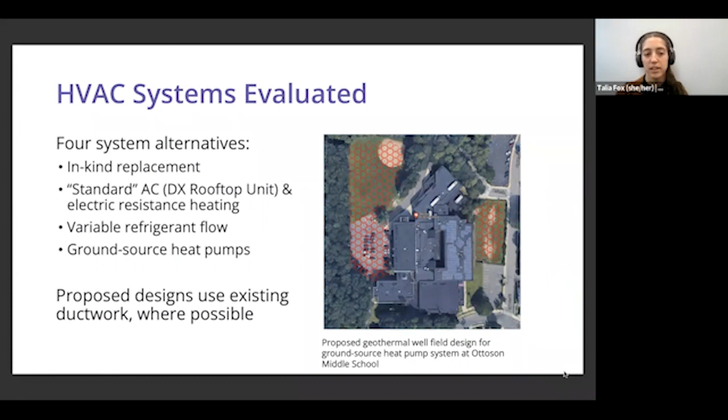You can see here on the right, as part of this report, we have proposed geothermal well field designs for all of the schools. This is one for Ottoson Middle School, which conveniently has some fields adjacent to the building where we can be drilling. And all of the proposed HVAC designs use existing ductwork where possible to try to reduce costs.

Some additional components, some of these things Pip had mentioned. So we looked at a few different things in terms of life cycle cost analysis. It included upfront costs, but also operational costs, maintenance, replacement costs, and solar PV costs, to really take into account what it's going to mean to replace these over the lifetime of the systems.

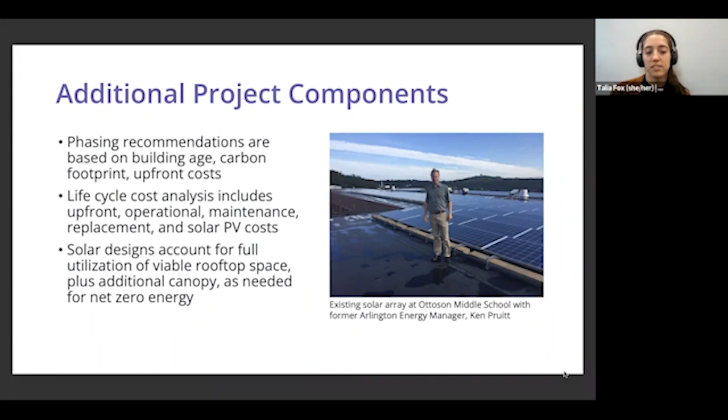We have some phasing recommendations that relate to in what order and how long it's going to take to electrify these buildings. Those are based on the building age, the greenhouse gas footprint of the different buildings, and the costs—just considerations for the town to keep in mind as we're thinking about how to sequence this. And then all of them have solar designs to utilize available rooftop space and an additional canopy as needed for net zero energy on site.

I think we've talked a lot about these incentives already. So the thing I'll mention here is that the IRA and direct pay option for ground source heat pumps is a real game changer for these projects.

For all of the schools, the incentives make it such that the ground source heat pumps cost less than the VRF system. And that's exciting because the ground source heat pump systems are more efficient operationally speaking. So that's huge—assuming we can make those ground source systems work, which will depend on the configuration. That will be big here.

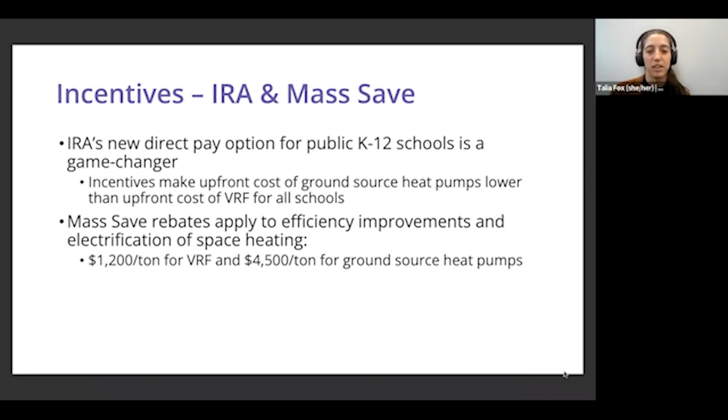So at a high level, some takeaways here: every system has its pros and cons, and I think the town's going to have to really think about some of these things, ranging from aesthetics to operational efficiency. I think every site is going to have its unique configuration and considerations there.

My biggest takeaway from this whole process has just been the amount of time it's going to take. When we're looking at the time frame the consultant provided for sequencing just 6 of our school buildings, we're looking out to 2035, I'd say, with a conservative estimate. I think that's ambitious, and that's just 6 of our buildings.

So if we're thinking about a 2050 timeframe for all of this, we really need to start planning ahead, not just in Arlington, but I'd say all across the state.

And it was interesting that we did this as a 6-school plan, because we know technology is changing and costs are shifting. So by the time we get to that 6th school, we'll see what everything looks like. And so we're thinking going forward that maybe it makes more sense to do this on a school-by-school basis, so the planning is a little closer to when we might actually implement.

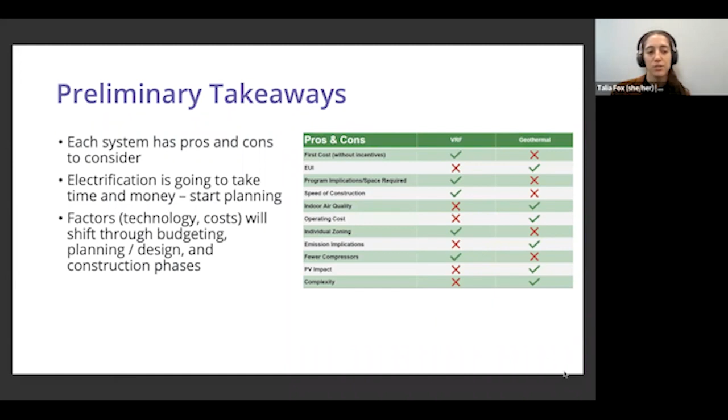And then we had some scoping challenges where we basically had to reduce the scope to fit our budget. So just a friendly reminder to state your budgets up front in your RFPs.